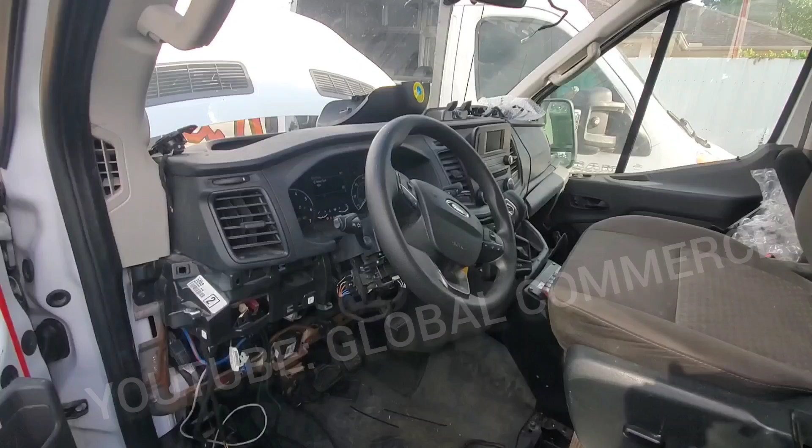Okay boys, we got a 2020 Ford Transit medium, this is an emergency vehicle, the big ones, the ambulance. It's an ambulance basically, and complaint is no crank. We've got a bunch of lights on, and supposedly the car was starting.

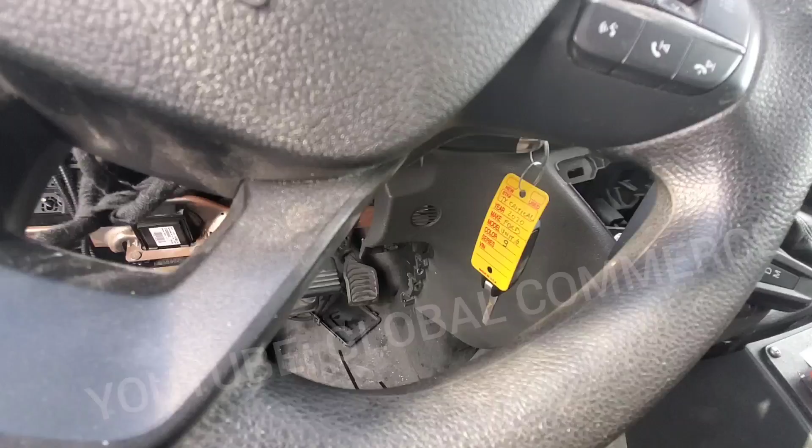Someone came to add and program an additional key, and once they did that, the car wouldn't start. They told me it does not have communication with the ABS module. So I just connected up to scan the modules and see what we got. But I did notice something as soon as I came here.

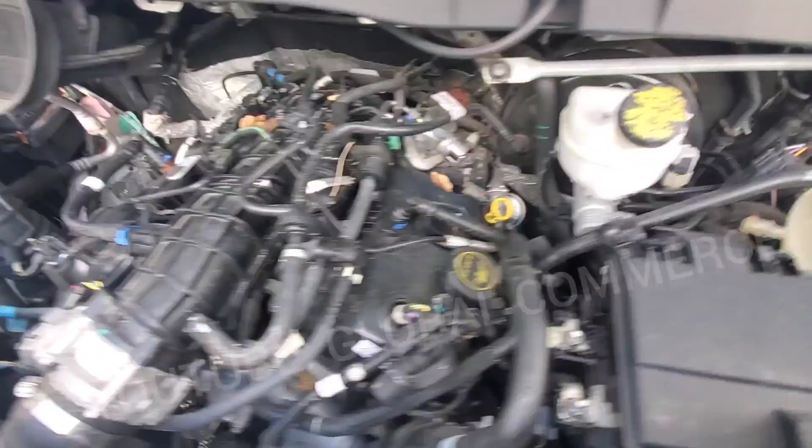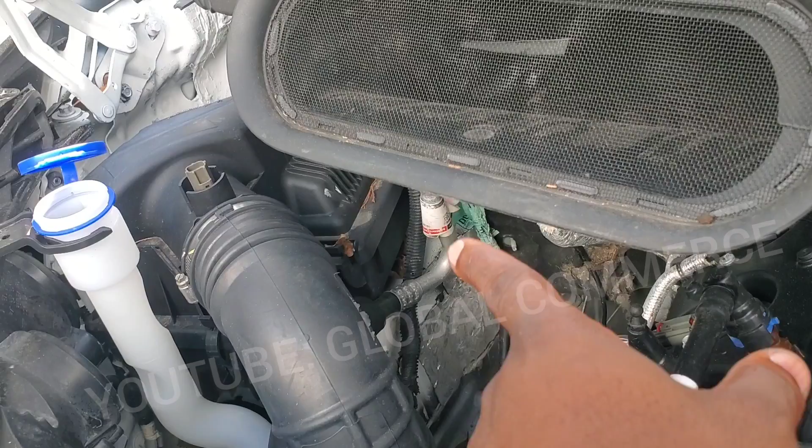See if anybody else notices it. Yeah, that's one thing I noticed. And that, supposedly there was an accident on the side, and this side was repaired. So I also noticed this. That's not right, so we're gonna check that out. Something else I saw.

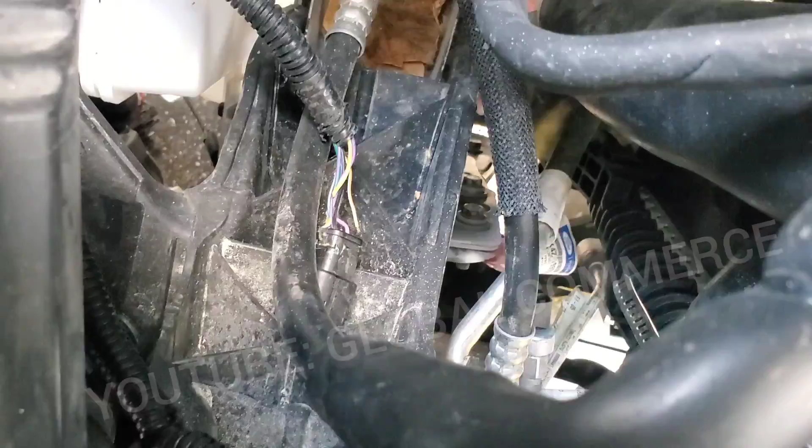See the connector? Keep going, see what else we got. Look at this.

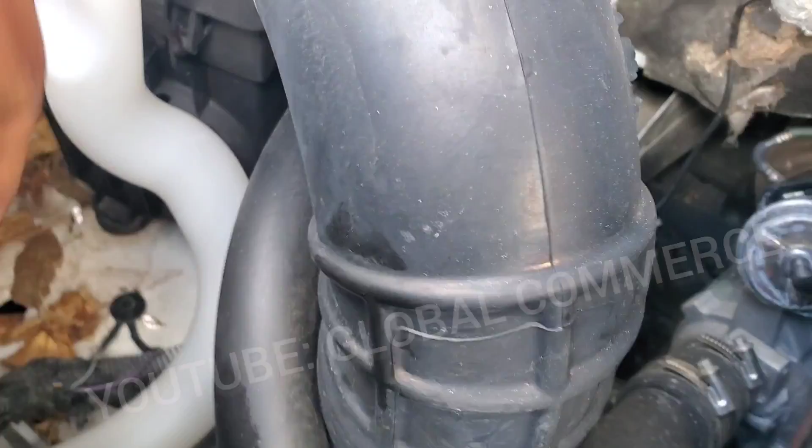Hooked up test light to battery positive, and I'm just gonna hit it right now for now. Still using that screw on the ground point, and we got a good ground. Test it out.

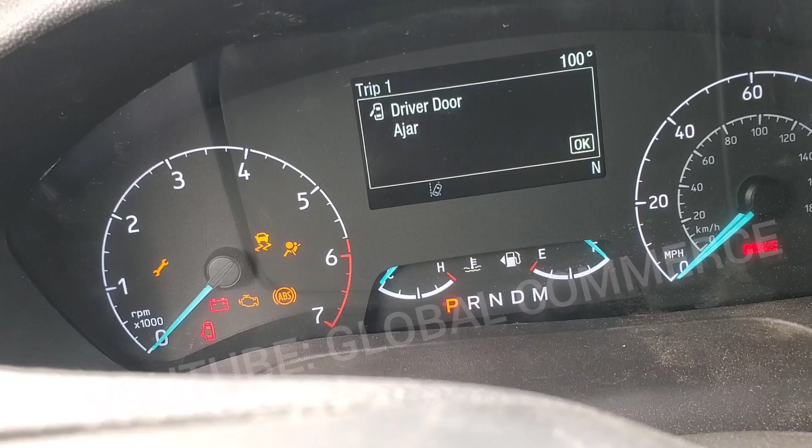Okay, key on, crank, no crank. Try the other key. Same.

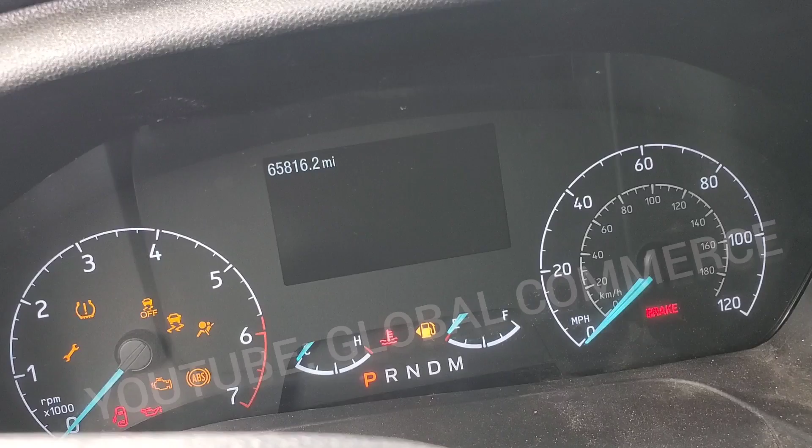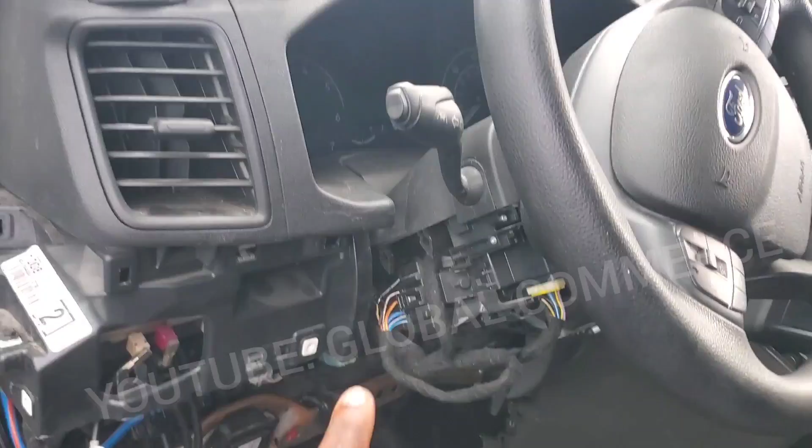All right, if you saw the diagram, it looks like high-speed CAN 2 is off, and it most likely starts here, and from here it goes to the ABS module, and the ABS module is offline. It terminates at the steering column control module, which has the terminating resistor for this module. Every leg of the network has a terminating resistor, if you saw the diagram, and this one ends here.

So I'm going to check here. I'm going to use the ultimate CAN bus tester. If you don't know about it, I'm going to have a link of it in the video, in the description. Check it out, this thing kills problems like this.

So we're going to start right here, see what we get here. Then we're going to come to the end of the network, which is steering column control module, and we're going to test it here. Okay guys, this is from the steering column control module.

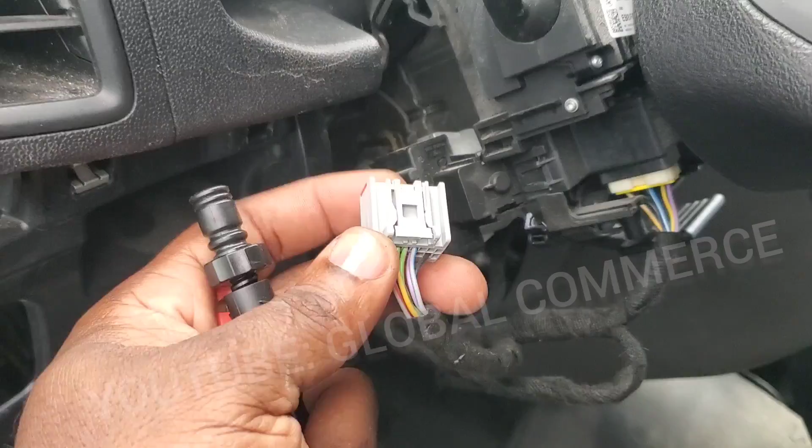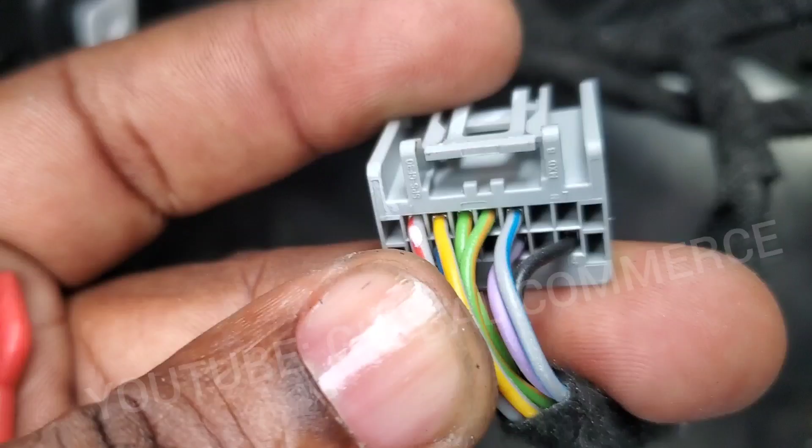That's right here, it plugs in right here. I went ahead and unplugged it, and if you saw the diagram, we're going to be getting the high-speed CAN 2 network, which is on pin number 4 and 5. So that's going to be 1, 2, 3. So that green and orange, and the blue and gray is our target. So those are the two cables, CAN high and low right there, these last two.

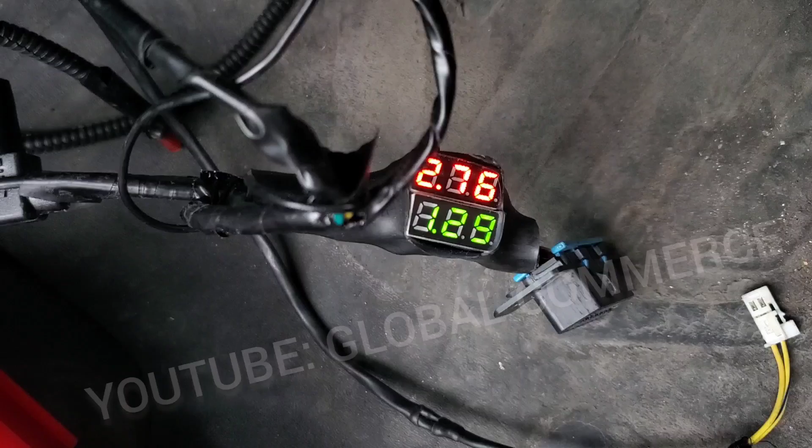So I probed into those CAN high and CAN low, and this is the reading we're getting right now. We're at about 3 on CAN high and 1.3 on CAN low, and it is not plugged in. So I was just seeing if there was some kind of reading on the bus. So this reading that we're seeing is from other devices on the network, which terminates at this gateway, right?

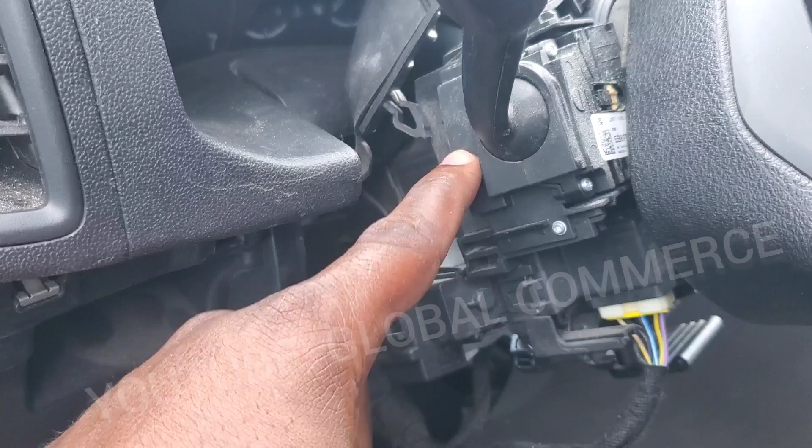So there's one terminating resistor inside this gateway, and the other one is here. So in the steering column control module, that's what terminates this high-speed CAN 2 network. So we're going to plug this back in, and we're going to see if that changes, and then we're also going to connect our scanner here and see if we can communicate back to the gateway.

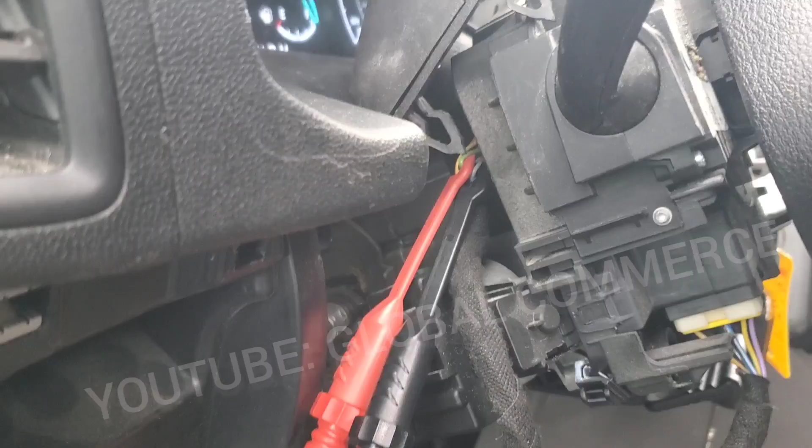From the gateway, we cannot communicate with anything on this bus, so we're going to try it backwards now from our scanner and going to the gateway and see if we can communicate to the gateway. Okay, I went ahead and plugged it back in to the column, and we're getting at about 2.5 and about 2 on the CAN low.

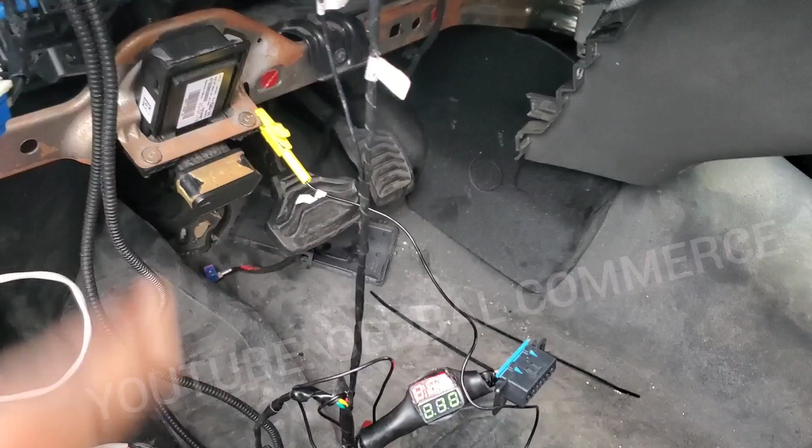So we're going to now plug in the scanner. Let's see what we get. There was no communication with anything.

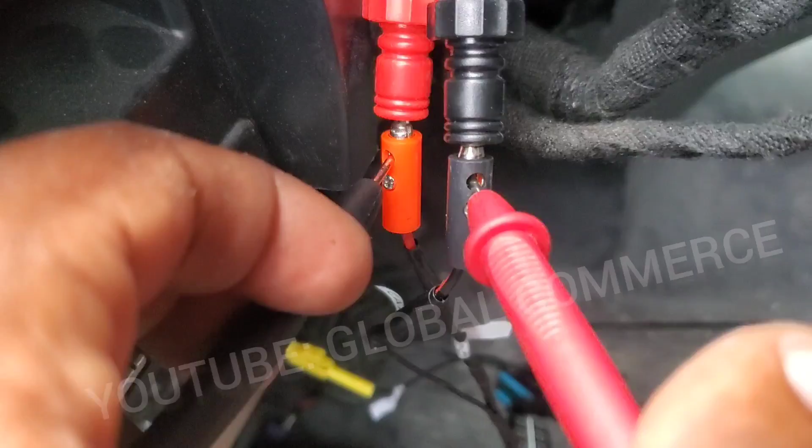I went ahead and connected my multimeter to the ports on the ultimate CAN bus tester so I can check resistance, and I'm getting 120, 119 basically. So that's showing one terminating resistor on the network.

And if I had to assume, it would be this steering column module. So what I'm going to go ahead and do is unplug it from the module and see if this stays the same or if this goes to infinity. Okay, and now it goes to infinity, and I've got it unplugged.

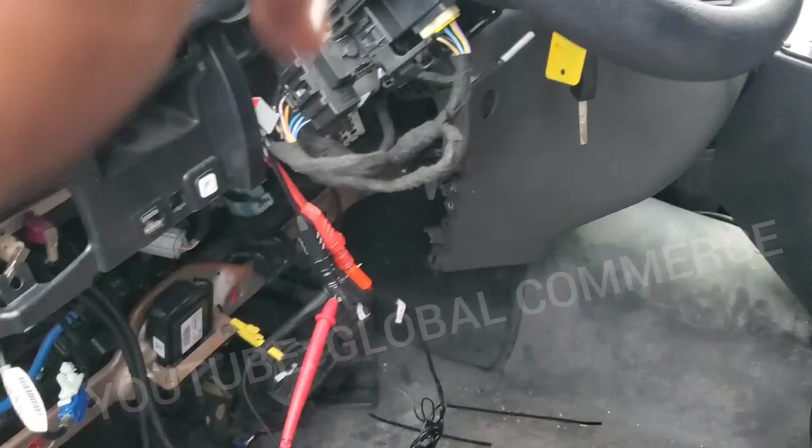So that tells me in the line going back from this to make it all the way back to the gateway, there's a connector most likely disconnected or damaged wiring cut, and it's not making it back to this gateway. So we're going to have to retrace and find where the problem is.

And the first place I think we should start is here and see if we have connectivity here, because I believe this camera is the first spot on the network. All right, guys, I'm connected up. So this is the output from the camera, and let me put some light here.

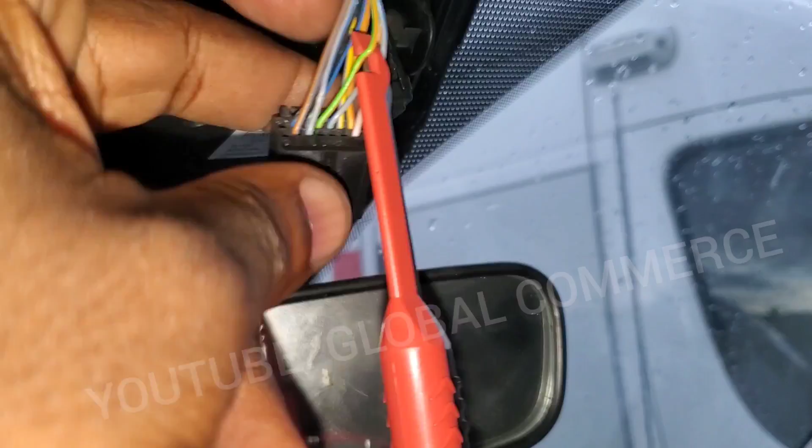It's on these two cables, the green and orange, and the one next to it, the gray and blue. And I'm getting no signal back to the steering column module or to the gateway. So there's a cut somewhere.

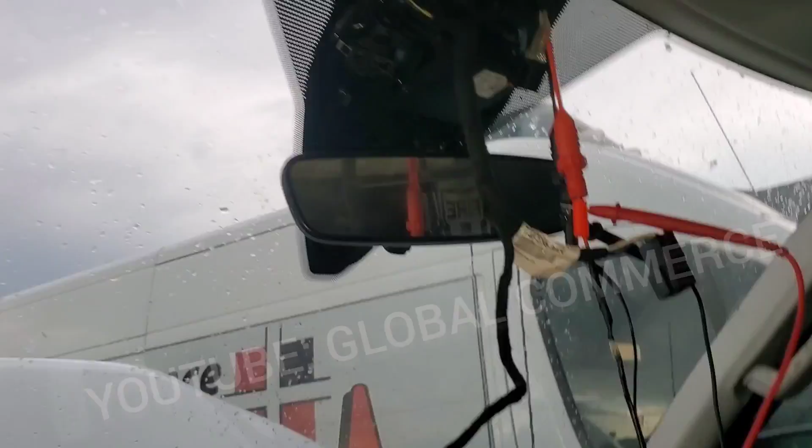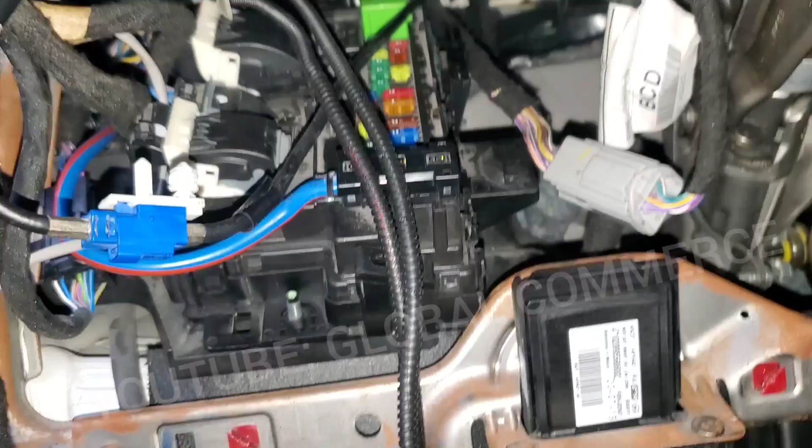So what I want to do too is look for where this goes, if it might come down here or there to make it down back to this gateway. So I'm going to try first this side and see if I see anything, because this was all open like this. People have been doing stuff, so it could be something halfway plugged in, unplugged, cables ripped out, something.

Right, so here's where we're at now. I tested from the glass to here, no connectivity.

I went ahead and disconnected the gateway, and I found that same network, HS-CAN 2, which is this gray and blue and the orange and green right here. And I have no connectivity to here or to here.

So I need to find all the different junctions and start going backwards from this gateway and forward, and most likely that's where the issue is going to be.

I'm going to have to continue on this, so I'm going to pull up the junctions and come back and hit this tomorrow.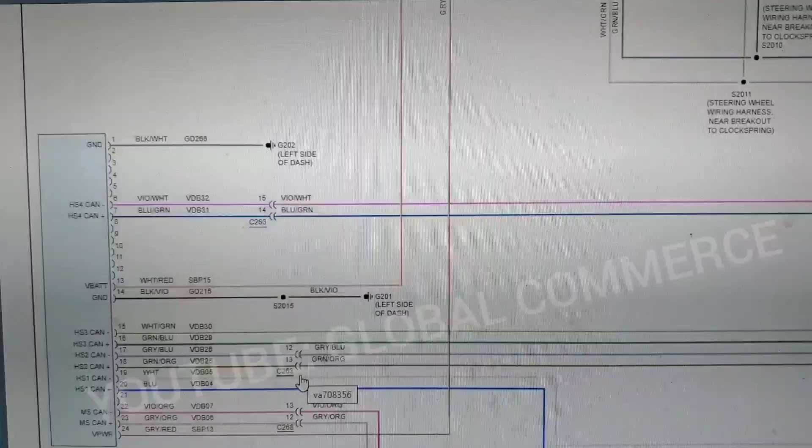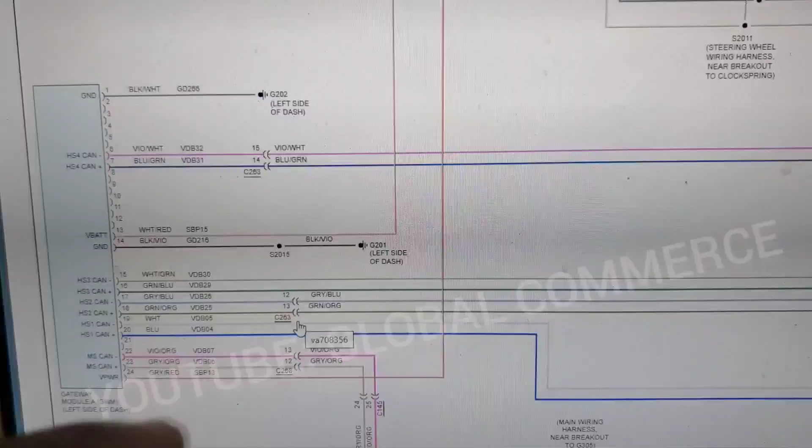All right guys, I'm back at the desk, and in talking to the customer, he told me up under the dash where the wiring is for the gateway and all this, the BCM, there was someone that worked there and was pulling out a bunch of wires and playing with stuff under there, and they kind of had the dash pulled out. He thought it had to do with programming a key, but from what he explained to me, I'm pretty sure it had to do with someone playing under the dash with all this wiring, not someone inserting the key into the ignition, that caused this no communication issue and this no crank issue.

So what I've noticed in reviewing the diagram now, high-speed CAN 2 network is us, right? This is the network that is completely down.

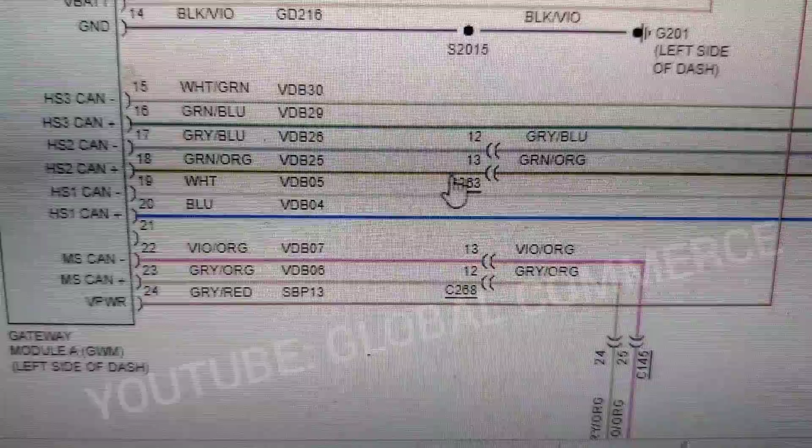On pins 12 and 13 here, this connector 263, it looks like there's only two networks using that. I'm not sure if this one, just went to double check with someone that was working on this vehicle, and he said there was a module, an audio module he saw online, but it is not on this network. So it's a good chance our problem is going to be at connector C263.

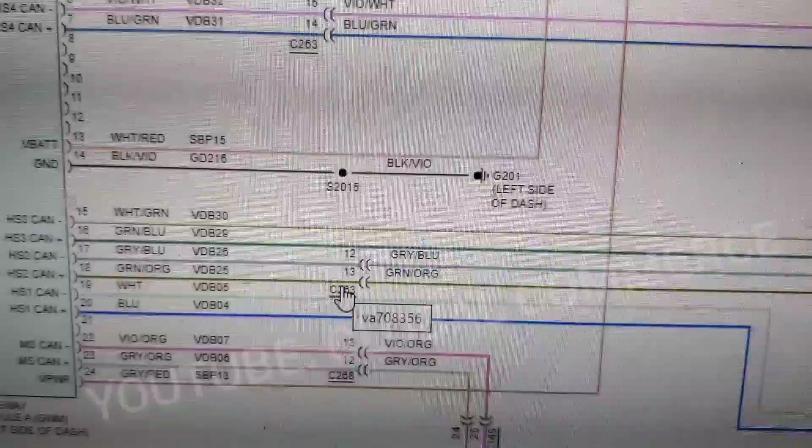So let me pull up where that is, because that 263 is what joins this network to the gateway and everything else.

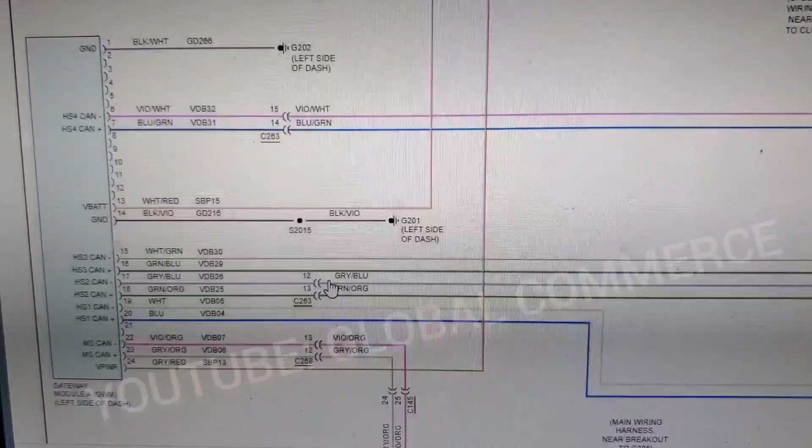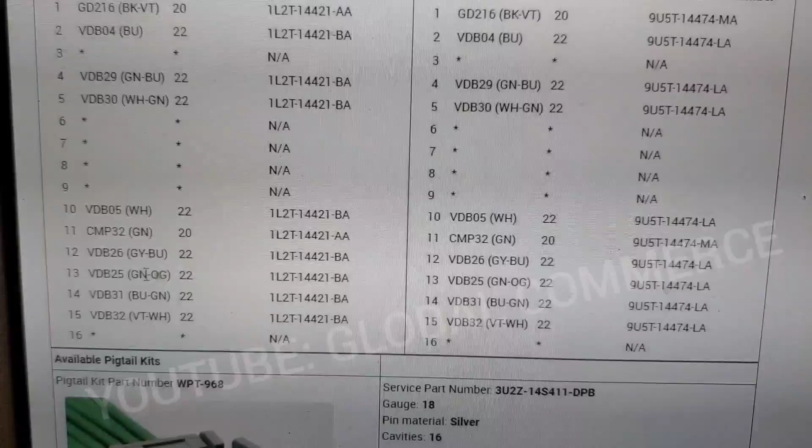So let's pull this up. Okay, here is the connector, and it would be, I believe, 12 and 13. So here we are at number 12. That's our colors there, gray and blue and green and orange. So that's high-speed CAN 2, 12 and 13.

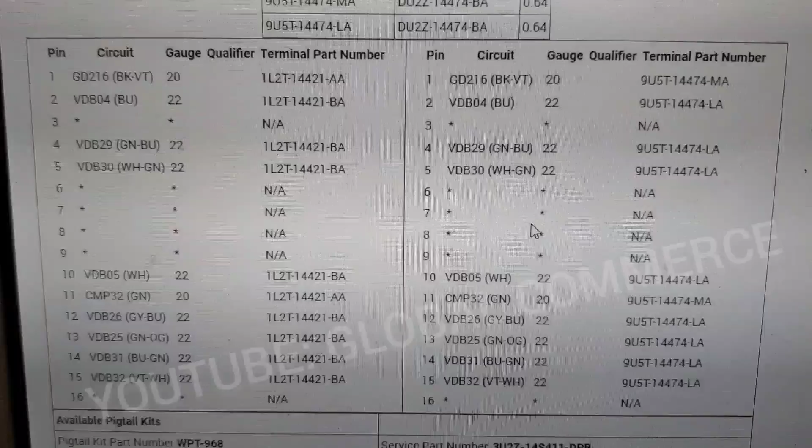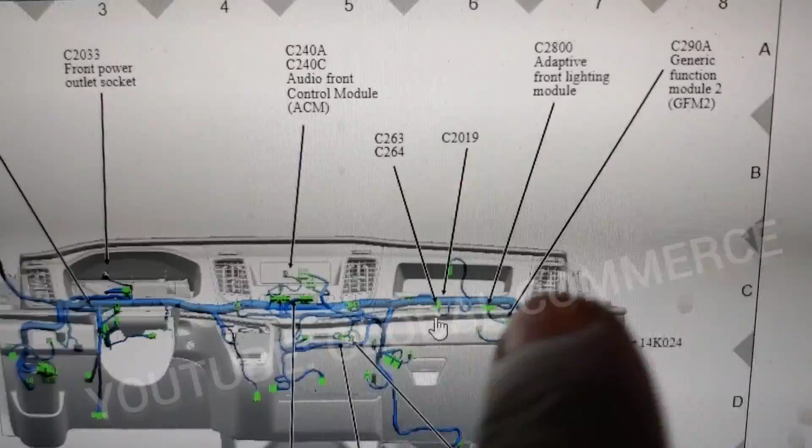Okay, and here's our map of the dashboard, and I was told the dashboard was taken off. So this could very well be an issue here. So 263 is somewhere here, and this glove box is removed, it's not on the truck. So maybe I can reach under here. I did not go to this passenger side, so maybe if I'm lucky, the problem might be right here.

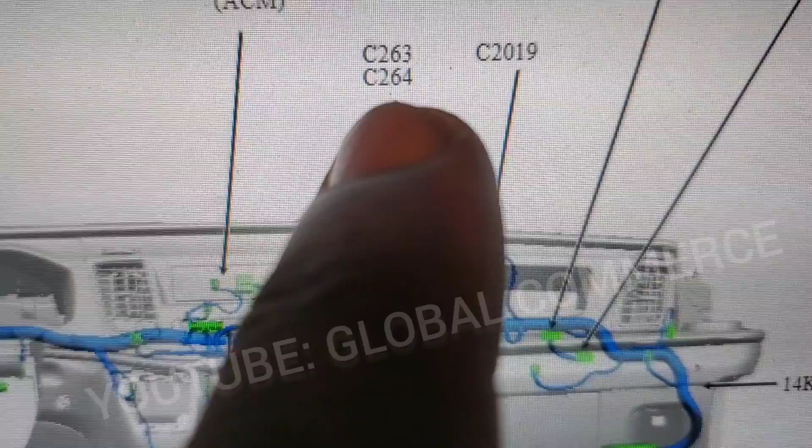So we'll see. Interesting, it says from C263 it goes to C264, and both of them are showing like it's designated right here, the same location. So we'll see about that too.

And then the next step from C264 is C210, so I'm gonna have to find C210 now. Okay, then it goes into here, C210. So this looks like possibly a fuse block or something like that, and this big connector here at the bottom.

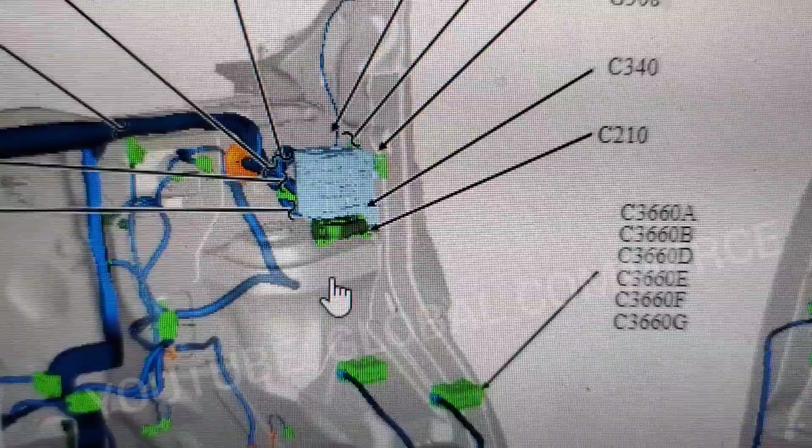Maybe it might be even easier to start testing from here, depending if I have access over there. This could even be halfway plugged in or something like that.

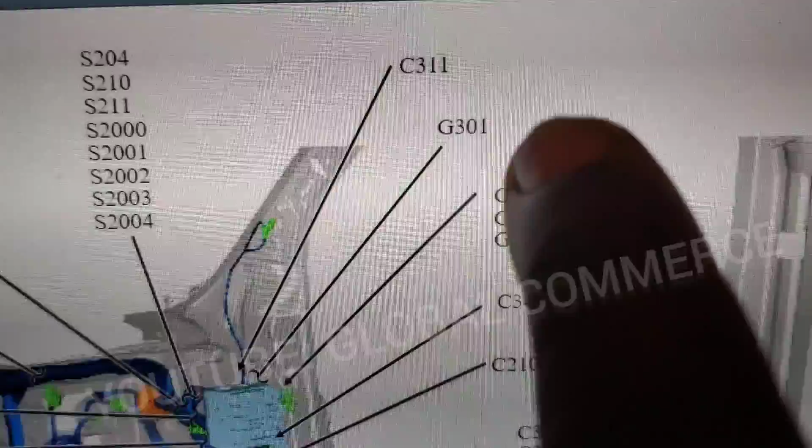Next connector is C311, which this doesn't really show much. I'm gonna have to actually pull that connector up. I don't know if it's behind the block, and that's why it's pointing like that. It could be behind, that's why we can't see it coming out of the back of that block, C311.

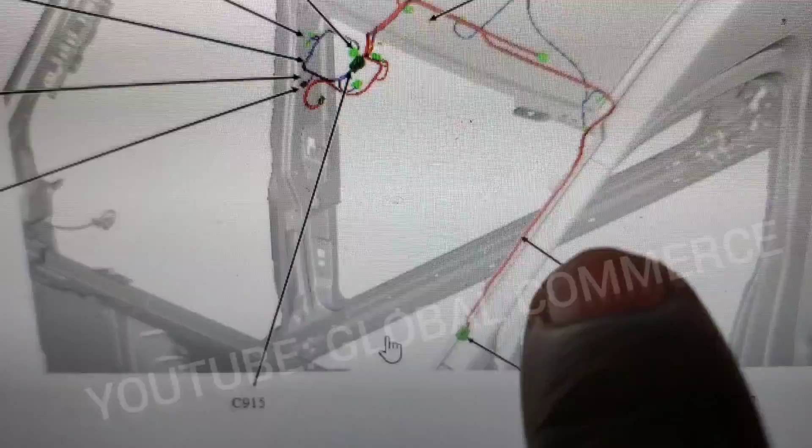Okay, C915, this is where we were working, and we tested from here down to the steering column when we had no connectivity. I noticed on this column the handle was open where I can get to the screws, so I'm going to pull this off and check this C219 as well.

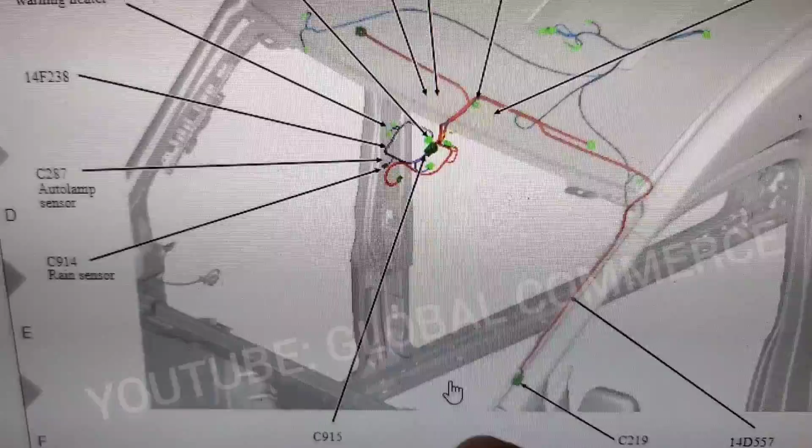It's funny, the diagram doesn't mention C219 in the path, but if you look at the red wiring, it has to go down this way. So something might be wrong in the aftermarket wiring diagram compared to the actual, this is an OEM wire routing diagram. So there might be some discrepancy or model difference or something like that, which is why that diagram is different.

But I think this is definitely the way to go. I'm going to start here and under the dash over there as well.